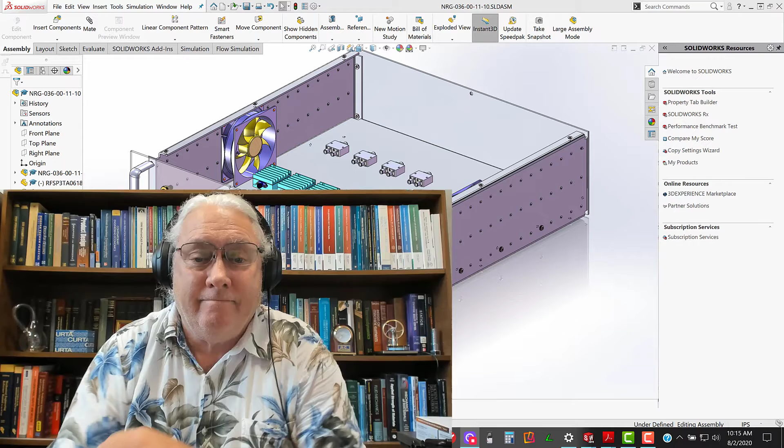Alright, here's where we left off our chassis design. I went ahead and opened up my earlier assignment, my DIN rail assignment. Everyone did already, so just make a copy of that, save it into the RF chassis folder in the root, along with the Dash 10, the Dash 30. And give it the Phoenix Contact part number, and we'll use that in the Dash 50.

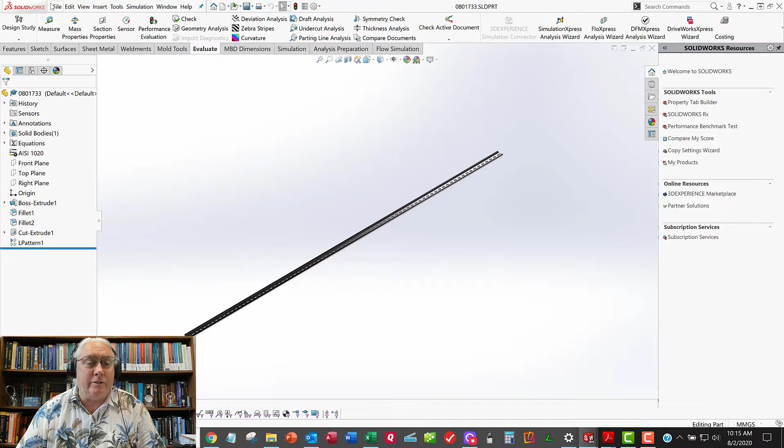So we're going to say File New, and we'll start a new assembly, inch. Could have used millimeter. It converts either way. And so first part, I think I'll just place my DIN rail.

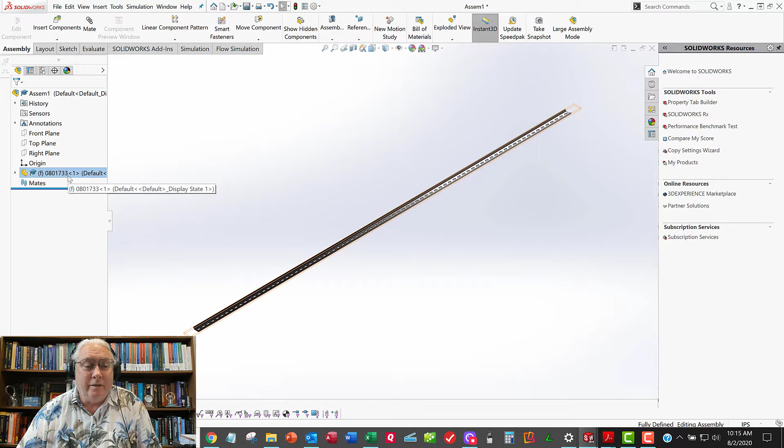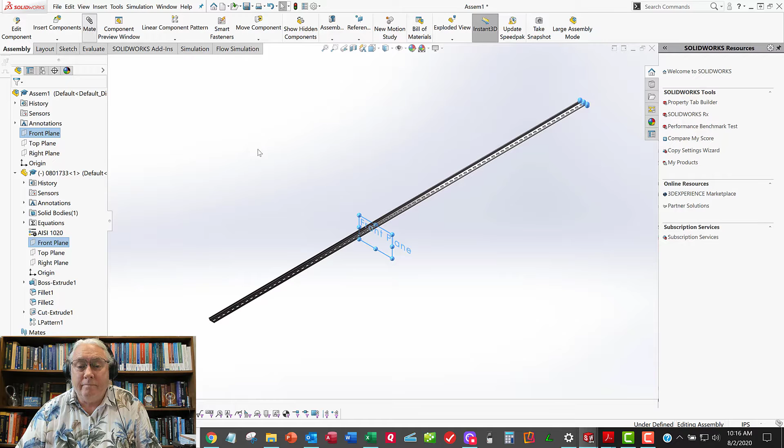Alright, so you're going to want to float this and mate the planes like we do. So let's do this for the umpteenth time. So we'll go front to front after we float it. And what's going on here? Delay, delay, delay. There we go. And let's keep going.

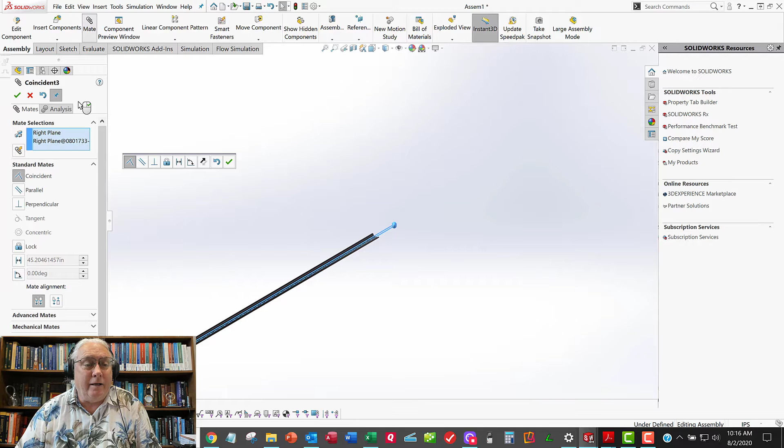Top to top. Hopefully this is all automatic pilot stuff. This has to be done in every assembly. First part, float it, and then mate the planes. Alright, so we've got a list of components.

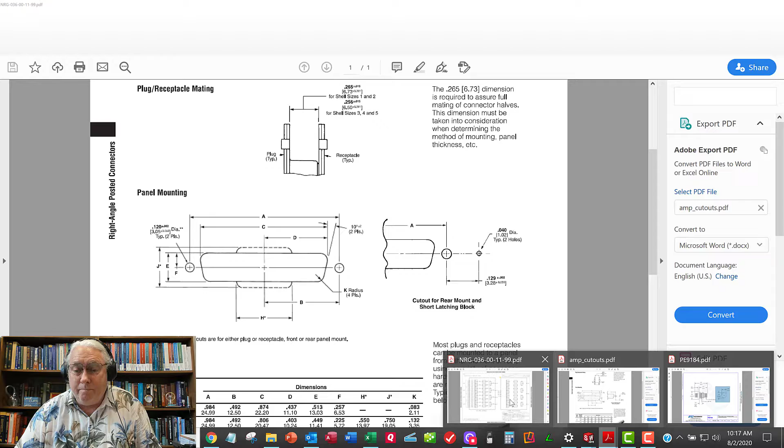Let's see if I can find the ICD. The ICD is incomplete. They should show up over here, but we already know from the parts list, based on our indented list we talked about in class, all of this stuff here is all DIN rail stuff that needs a report, including the DIN rail itself. Those are all the Phoenix Contact cage codes. So all those need to go together.

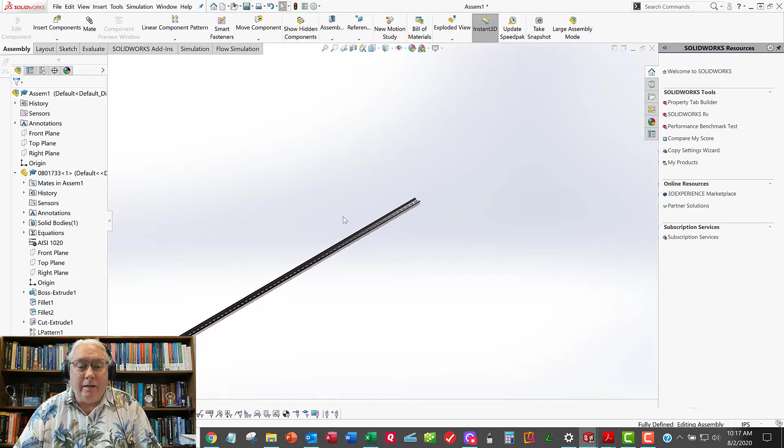So the end clamp kind of closes this thing off on each end, and then everything else goes in between. And so let's put one of those end clamps in first. 08, 008. And so I got a new assembly. We'll place a new component. Go browse. 08, 008, maybe that's it.

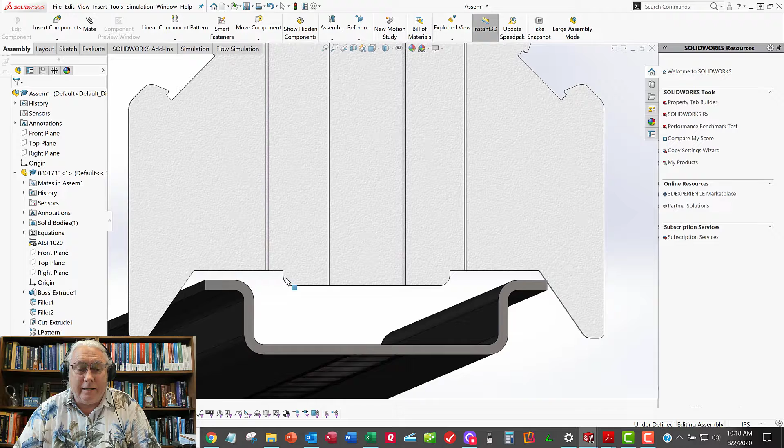Alright, and so obviously my DIN rail is too long. You'll need to cut it shorter. And so these models are not 100% accurate, but you kind of get the idea. This thing here is going to clamp down with a screw coming down from the top. And so obviously this face here needs to be mated to this face here. So we'll do that one first. And we'll approve that.

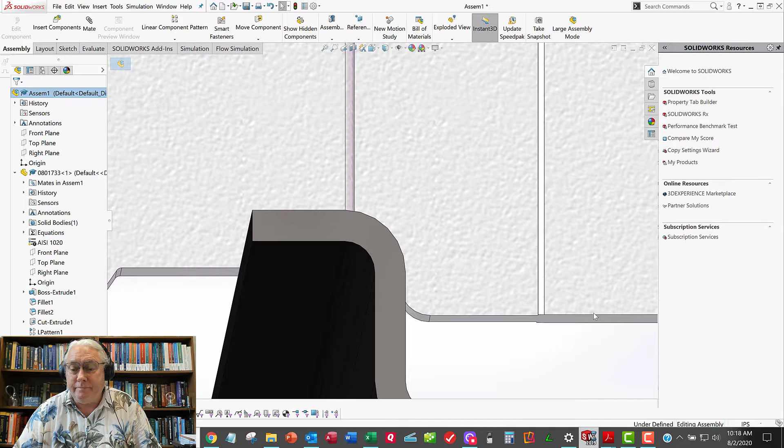And then we'll look at this thing from the front with my spacebar view cube. I'm patient enough. Can't wait to get a new version of SolidWorks going.

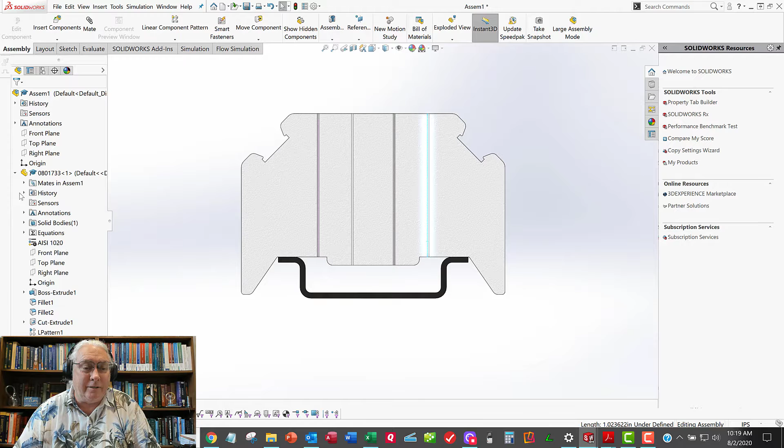Alright, and so now this thing needs to be constrained side to side. Well, where does it go? I mean, it doesn't really have a face to mate to, but it needs to be centered. And so let's just center this thing. And let's look at these planes. There's a front plane, there's a top plane. It's got a plane in the middle, it's already in the right plane. Oh, no, that's the DIN rail.

Here we go. So here are the planes on the end piece. So where's the top plane? Where's the right plane? Well, they're way out here in space somewhere. This is ridiculous. So whoever made this CAD model doesn't understand how to make good CAD models. And so I just downloaded this from Phoenix Contact, and these planes are in lousy locations. So let's go make a plane we can actually use.

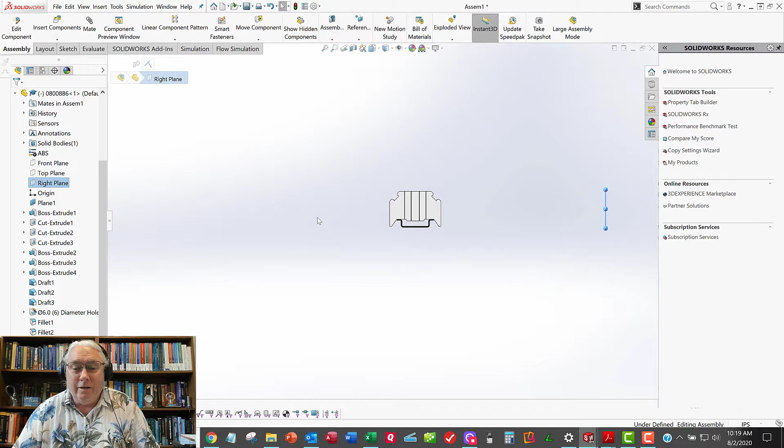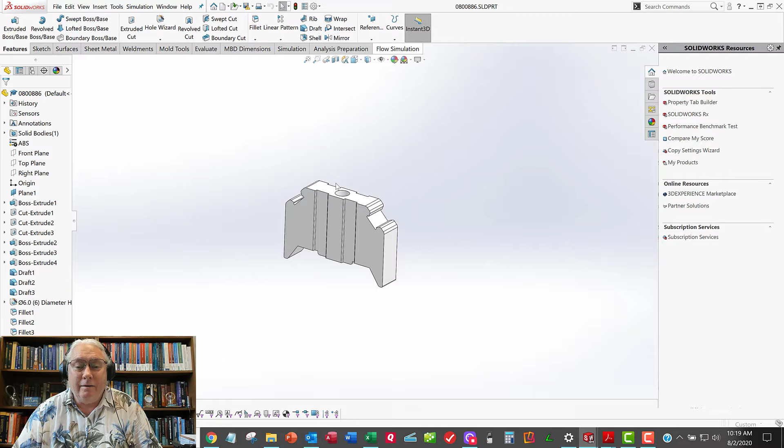And so just open up the part, open up the correct part, and let's put a plane in the middle. So that's easy to do with this feature, reference geometry. Pull that down and go plane, and I'm going to select this face, and it's guessing I want to do a 10 millimeter offset, but I don't want to do a 10 millimeter offset.

So now I want to define a second reference, and it's guessing, oh, he wants one halfway between the two. So there we go. So I got a new plane. It wasn't part of the plane that came from the model I downloaded, but that's exactly what I want. And so I'm going to save and close this.

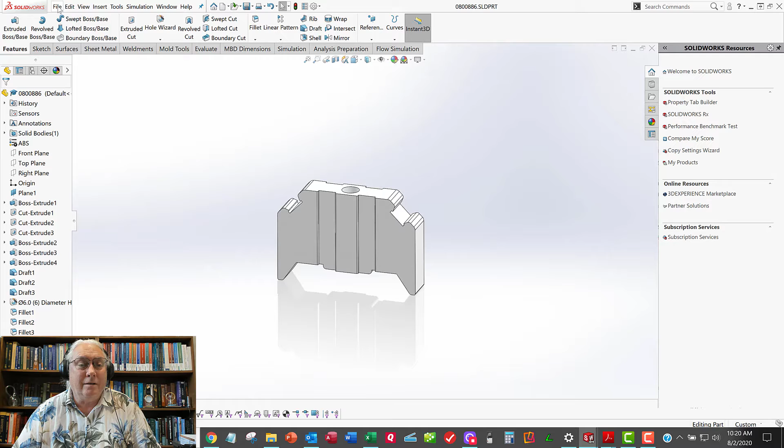And now I've got a plane I can work with. So now I'm going to go dig inside this guy and find that plane I just put in. And then the DIN rail tells that part where to go. And the DIN rail, you know you made it correctly to put that plane in the middle of the part where it belongs.

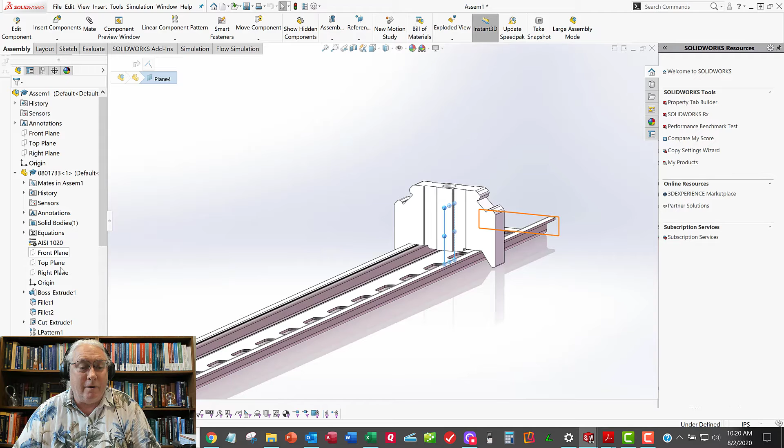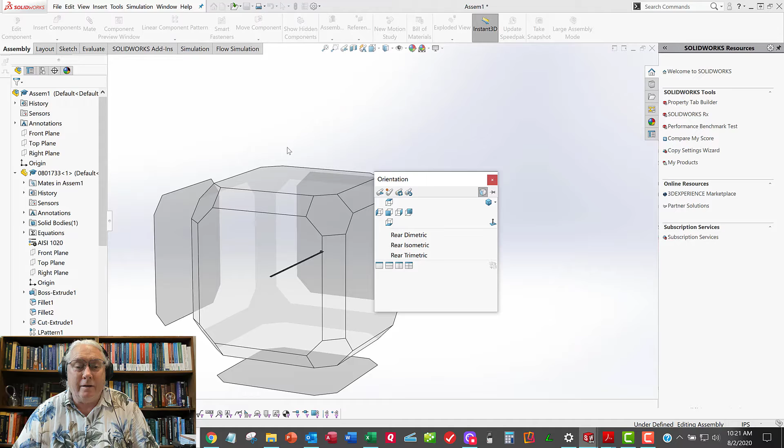And now we can mate this thing side to side. Come on. No. There we go. Mate those together and approve that, and then take a look from the front. And so even though we didn't really have a feature to mate to, it's centered. That's good enough. All right, so we got one of them on there. We'll stack everything else up, and then we'll close it out with another end cap.

All right, so we got more stuff here. Let's insert the power supply. And we don't know what order we're going to do this, so make your best design decision. Power supply, 2902. 2902, where is it? Why am I not seeing it? 2902, that's not it.

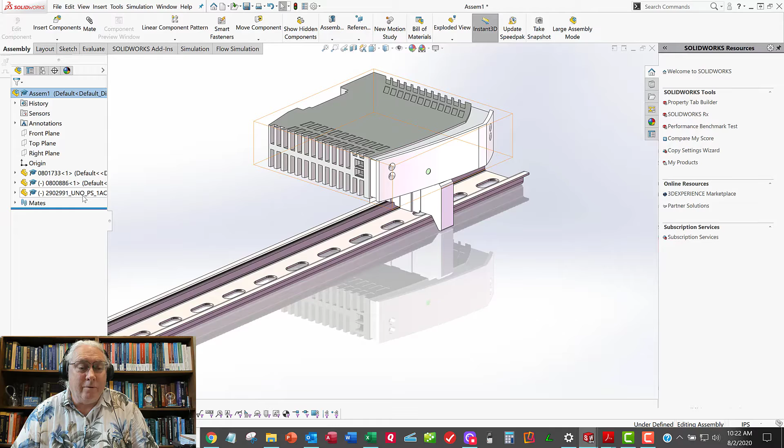Where's the parts list? Parts list, power supply, 2902991. 2902. Why am I not seeing it? Is that it? Oh, that is it. That part number doesn't look right. I don't know all the Uno stuff. That shouldn't be in there. All right, hopefully you got the right one in your folder.

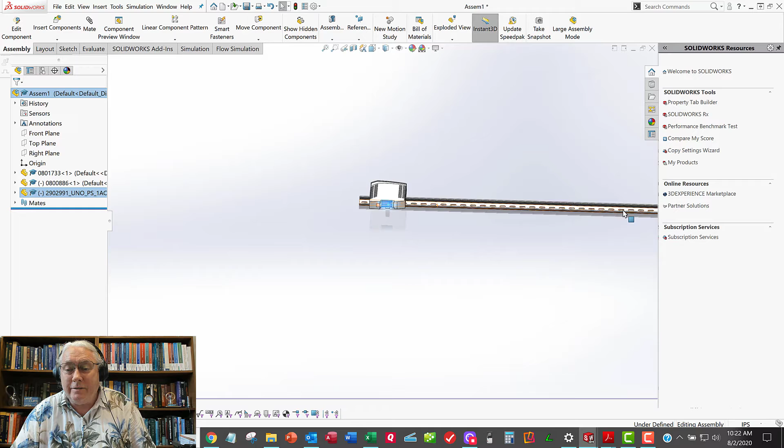All right, so this thing has got a little bit of feature here. This is some kind of spring-loaded snap-in thing. And who knows, maybe that looks like it's at an angle there. And so anyway, we'll make it work. So let's grab that face and grab the top face of the DIN rail, mate those together. Okay. And now let's take a look at this thing from the front and see what we're going to do, as soon as it comes back to life.

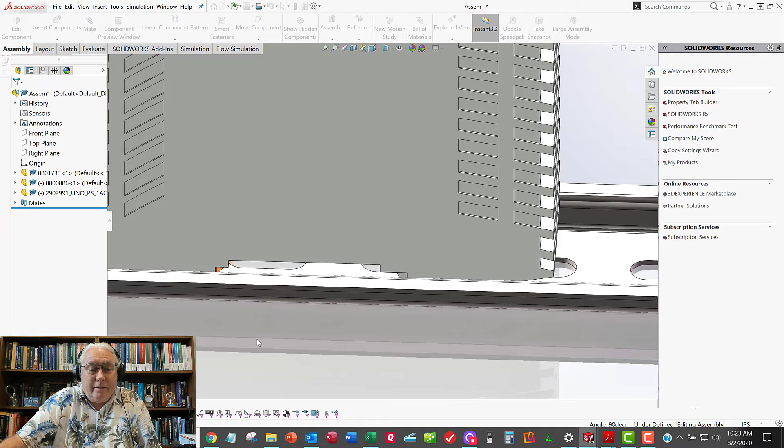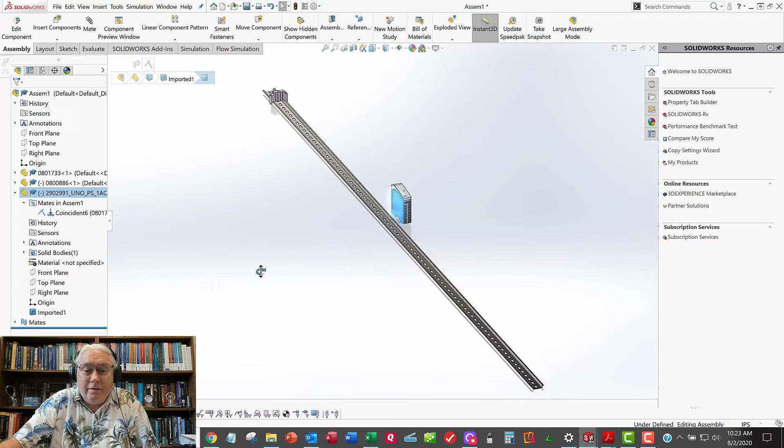Alright, let's look at this thing. Maybe from the back side. Oh, that didn't look good. What did I do wrong? Mates. Oh no, that's okay. I just need to rotate it around. Alright, so this thing is going to sit flat up against this guy here, so I'll control click those two, mate those together. Now we're getting somewhere. Alright, so now it just needs to know side to side where to go.

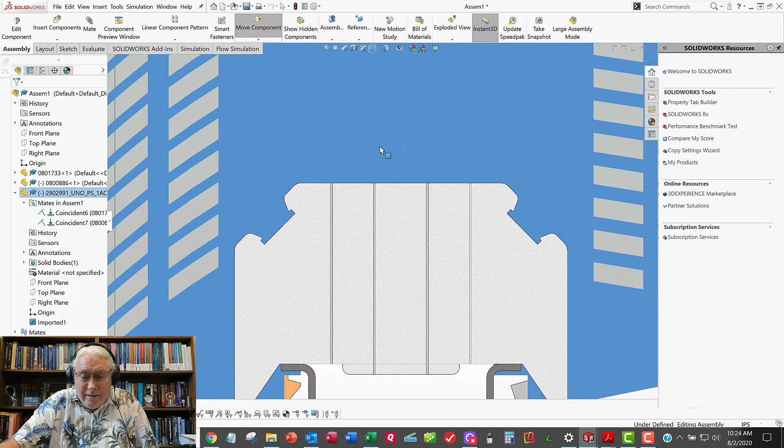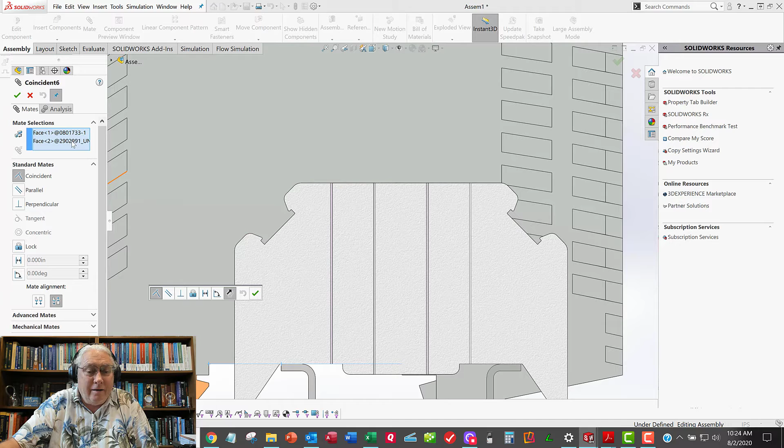Alright, now we can look at this thing from the back side and decide what to do. That's not even the right face. We need to mate it to this face down here. That was a bad idea. Look at that. It's not where it needs to be. So let's go fix this thing. That's that face, that's that face. Right click, edit feature. We're going to get rid of that face on the power supply. And we're going to instead select that guy right there. I'll eventually get this right.

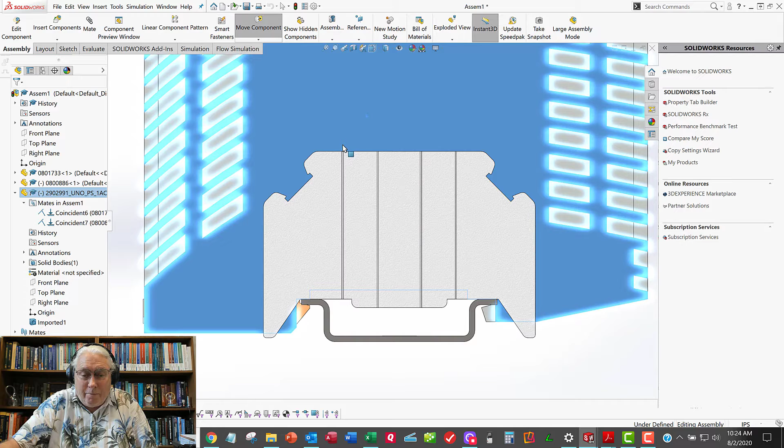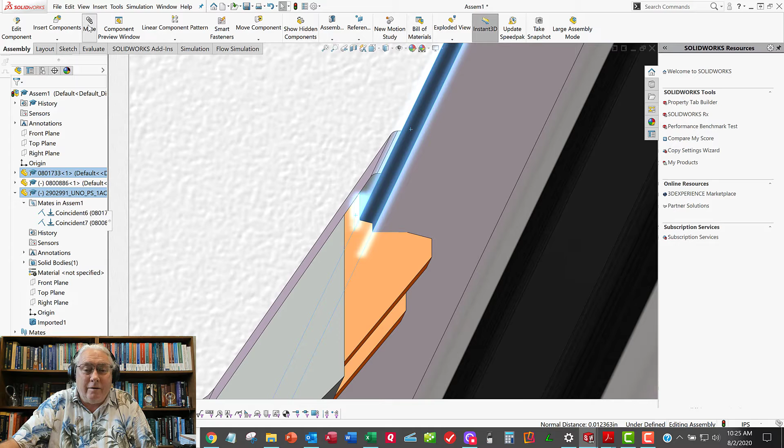That looks reasonable there. Alright, so it needs to go somewhere in here. We could put another plane on there, but those look like two parallel surfaces. So maybe we'll just mate those together. So where is that surface? It's right there. Select that surface. Control click that surface. Mate those together. And maybe that's good enough. Look at a back view again. That seems reasonable. Oh, look, it's kind of close there. Alright, so we could have put a plane in the middle like we did on the other one. But that'll work just as well.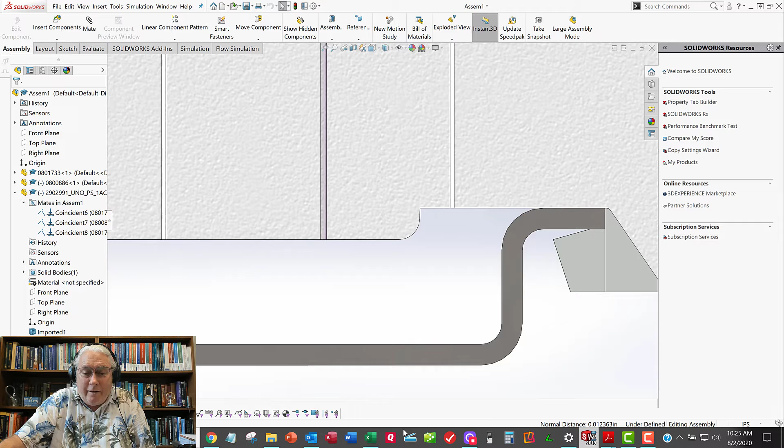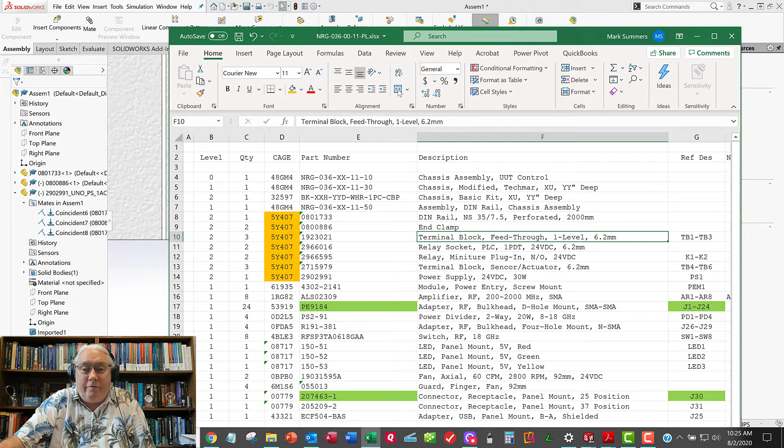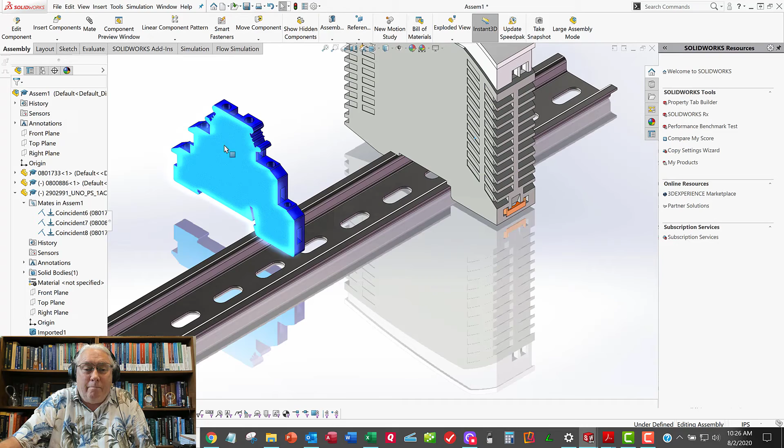Alright, so some of these components have multiple instances. Like this terminal block here. And this relay socket. Let's put this relay terminal block. What is this? 2715? Let's put him in there. So insert components, 2715. Is that it right there? Alright, that's pretty wacky looking. Alright, so we'll put him back to back. These things just stack up back to back. So we'll mate those two together. And then we'll approve that.

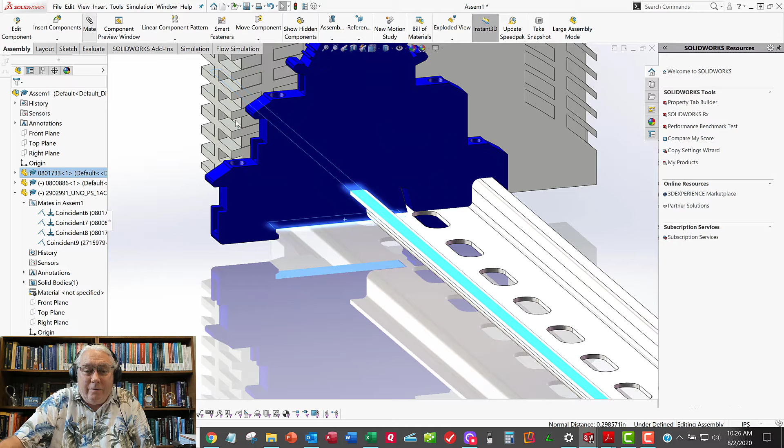And then it looks like maybe that surface right there, it looks like the bottom surface that mates to here. And so the first two are pretty straightforward. But let's take a look at a side-to-side mate. And so let's look at this thing from the back side. Whoops, let's look at it from the front side.

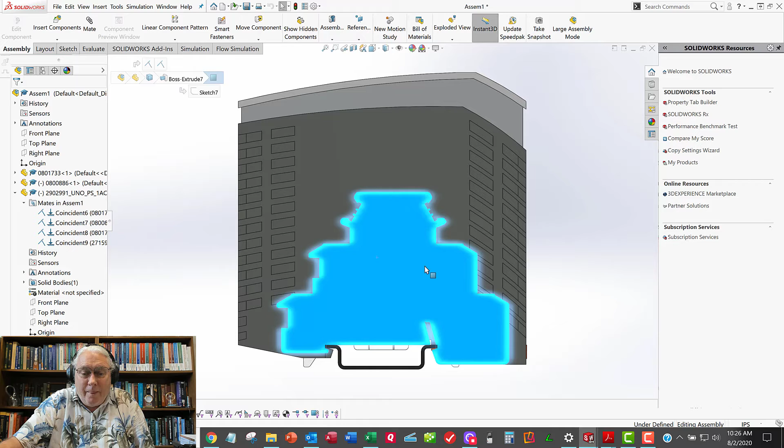There we go. So what are we going to do here? Well, this thing is designed to be flexible over here. So this thing, when you pull this thing out, I'll have to show you a picture of a real piece of hardware here one of these days. This thing is made out of plastic, and that thing will flex out, and so who knows where that surface will be. So we could put a plane in there, but it looks like that's a vertical surface,

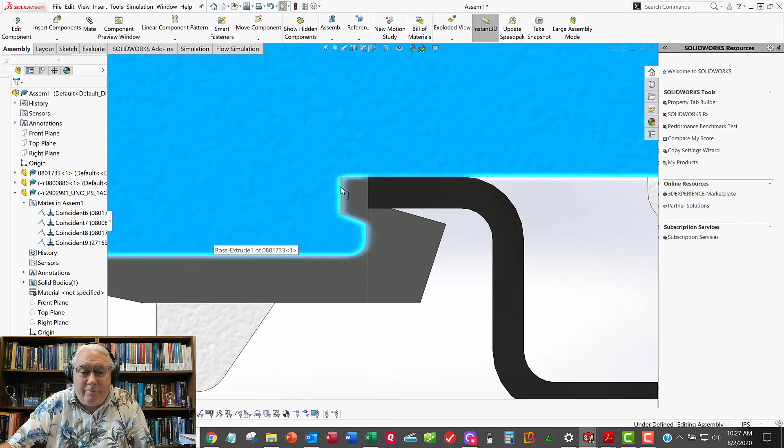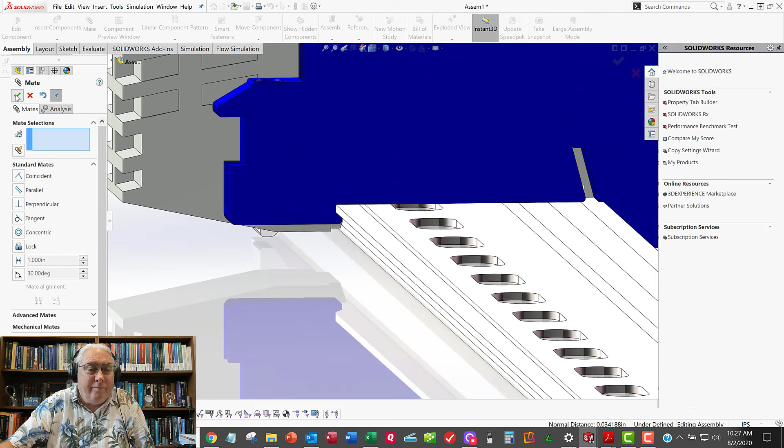so let's just mate those together. And so I'll come over here and find that face right there, and then control click this face right there, mate those together. Okay. Now let's see what it looks like.

So the models aren't horrible. They're pretty close. That looks reasonable. This is sticking out into the part, but we know this thing is going to flex. And it's going to sit approximately right here. So they're not going to manufacture anything based on this model. I just want to give them an image to figure out how big this thing is going to be and where it's going to fit.

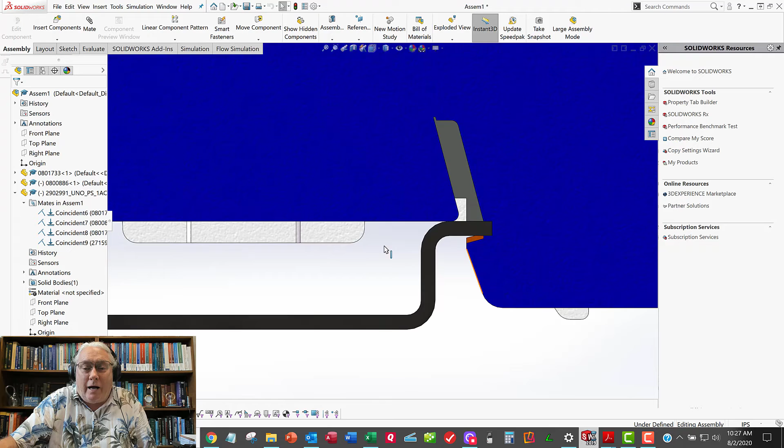Alright, so now we got 3 of these, or 2 or 3, I don't know how many we have. We got multiple copies of these. We could put in multiple instances, but it's going to be much easier to do a linear pattern. That way if I need to add another one, I can just add one to the pattern. So let's select the component in the tree over here. And that's it right there. We're going to go linear component pattern.

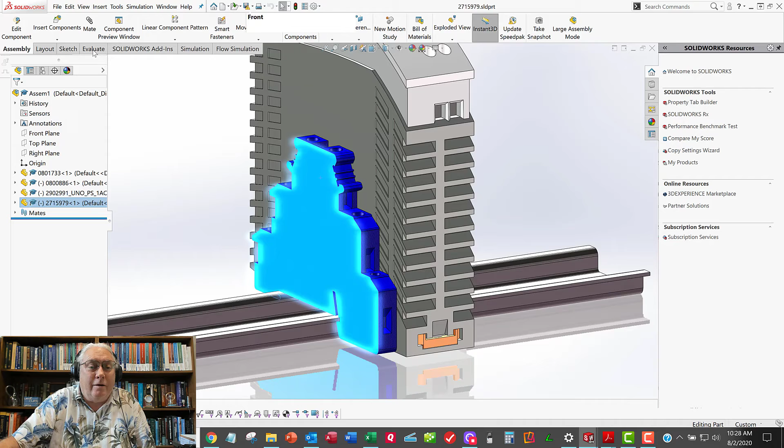Before I do that, I want to measure and see how thick this part is. So I can open them up. I'm going to go to evaluate, measure. All these are old files. Make sure to save these things so you get the new version. Evaluate, measure. From here to here is how much?

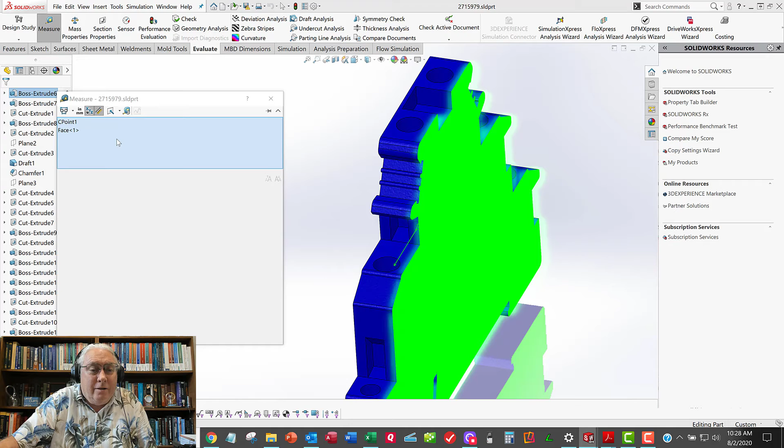Well, it's a metric part. I'm going to pull this down here. There we go. So that's not what I wanted. I want to go from there to there. 6.11 millimeters. All right, so let's do a pattern of 6.11 millimeters.

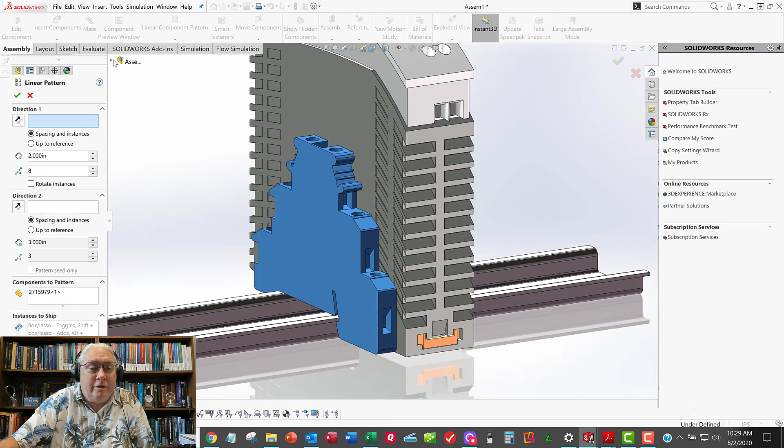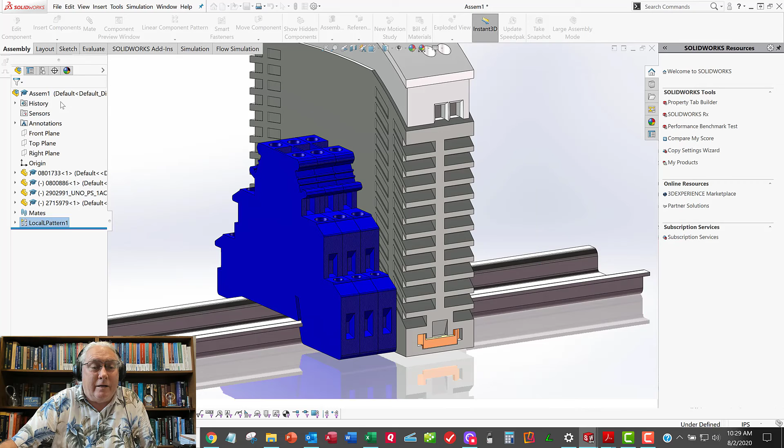So I'm going to select this guy, linear component pattern. The direction is going to be defined by that front plane, say. And I can type in 6.11 mm, even though this is an inch assembly. When I type in 6.11 mm, it converts it to the correct number of inches exactly. And so I don't know how many I have, but if I have 3 of them, I can do 3. There we go.

So keep stacking these things up. When you get to the end, put another end cap on it, and you're going to want to obviously make your DIN rail a little bit shorter. You can measure the stack up of all the Phoenix Contact parts, and then come up with a total distance, and you can center this thing side to side so it sits in the middle.

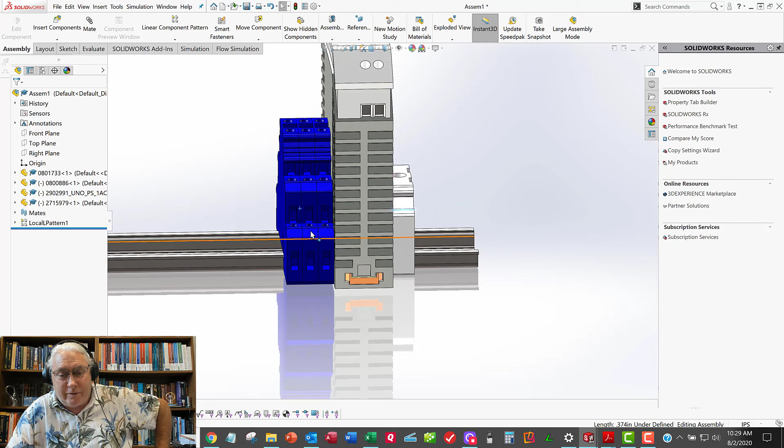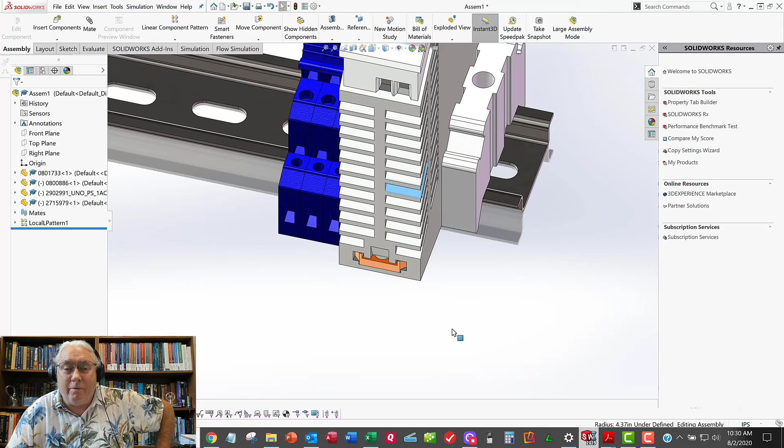You want to make sure you don't have this thing looking like this, because you won't be able to get to that slot to put your mounting hole in there. So make sure you get it close to the edge, but not right up to the edge. You're going to want to move it over so you get that slot you can see to put your screw in, and same thing on the other side. This thing ever comes back, I'll give up on that. All right, so I think that's it. There we go. So yeah, that looks more reasonable. Something like that would be fine.

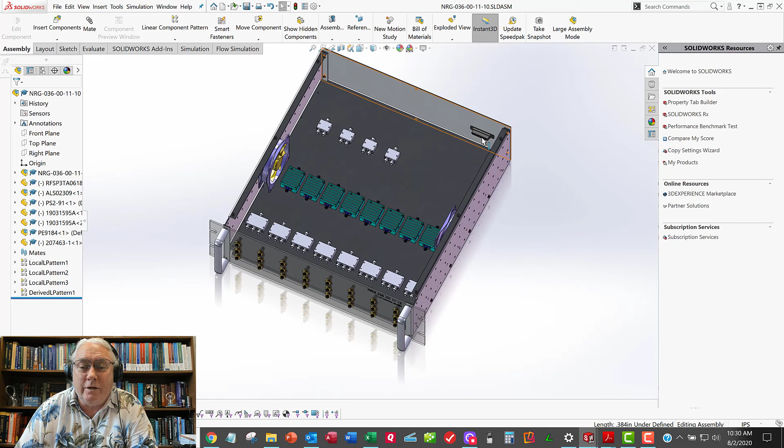So once you get your dash 50 done, you're going to place that into your dash 10 as a subassembly. I want to put mine over here. I want to keep my power and control stuff over here. So my power entry module is going to be over here, and these RF connectors are going to be over here. So I'll keep those separate. Then you can throw in your, what do we got? We got the finger guards. Got a few more things to go, but I think you're getting pretty close.